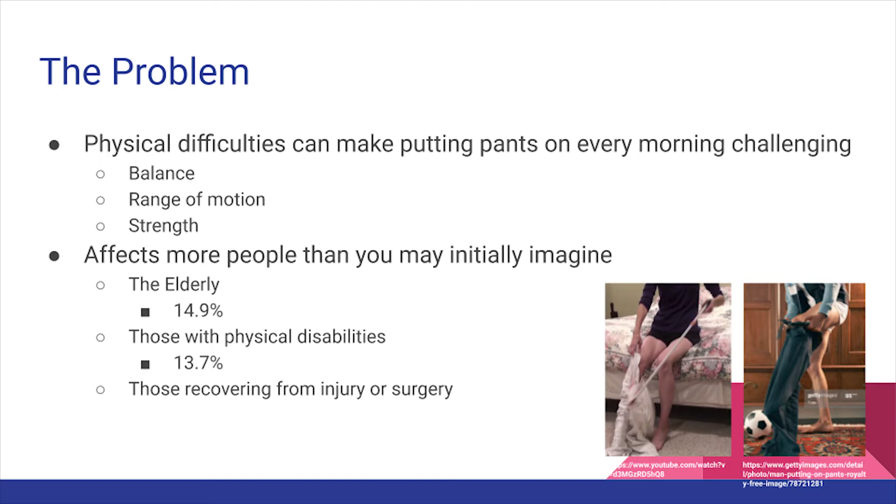The truth is, the world is designed around the average person, and the average person is young, able-bodied, and unimpaired physically or cognitively. But most of these people are also destined to reach an age where this average world also underserves them. We want to have the first product to completely automate pants dressing with zero user effort.

This product won't be as flexible as something like that aforementioned grabber, and makes the assumption that if you're putting pants on, you're walking out the door, so you may as well knock out both in one daily action. However, we'll also be the first product to serve those who are less than able, as opposed to the highly competitive market for serving the totally infirm.

And while we're unlikely to be the cheapest or most successful product to ever serve this need, we hope that any success will spur similar innovation and competition in the domain of products which augment user independence.

Here we have our top customer requirements. They mostly boil down to put on pants without any user effort or particular ability beyond attaching pants, standing up, and pressing a button. Here are all of our identified product functions.

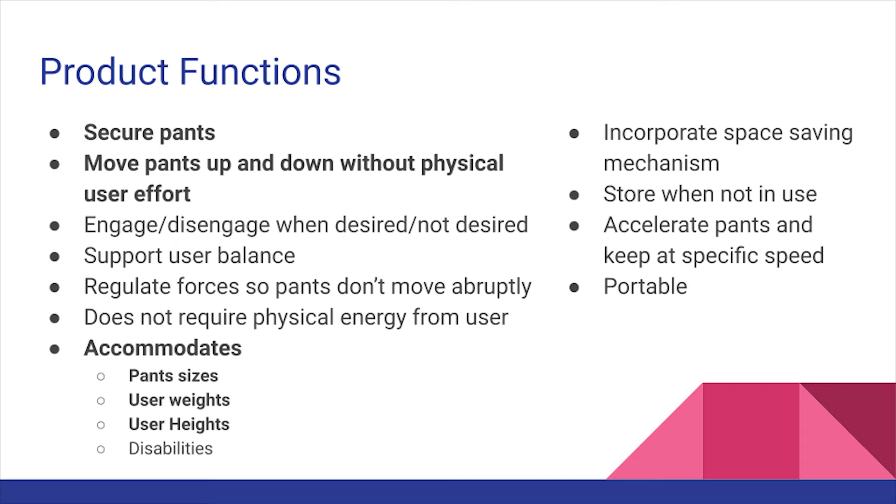Those in bold were refined further as a group using the 635 method in order to assist with design ideation, but also important considerations in our concepts were supporting user balance and engagement and disengagement methods.

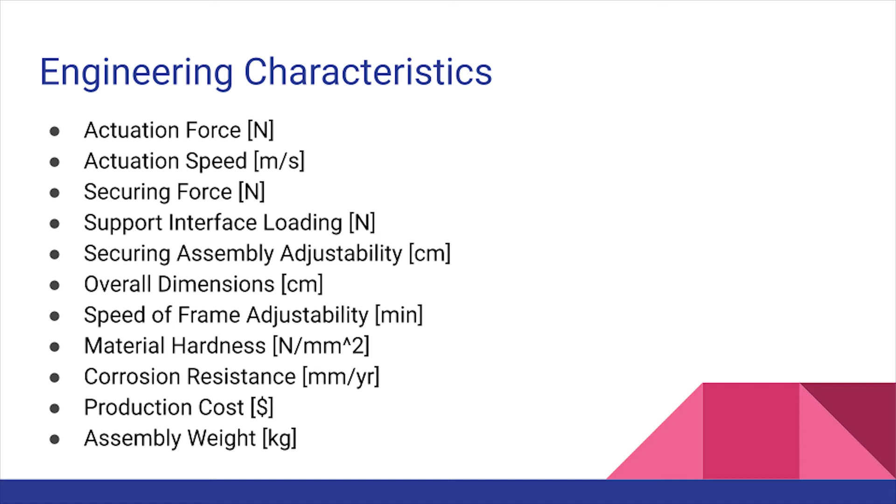This is a list of engineering characteristics we developed, which we believe effectively quantified all relevant performance metrics during the solution-neutral concept development process. But despite solution neutrality, there were universal constraints we needed to consider for any design.

We decided to design our minimum max load case around the 95th percentile male, as this would include more than 95% of the population. This meant we needed to support that weight, which would be 98 kilograms, and actuate to that waist height, which would be 122 centimeters.

This is also a household object, so it had to fit through US building code doorways, and needed to be a reasonable weight for an able-bodied person to manipulate if assistance was required.

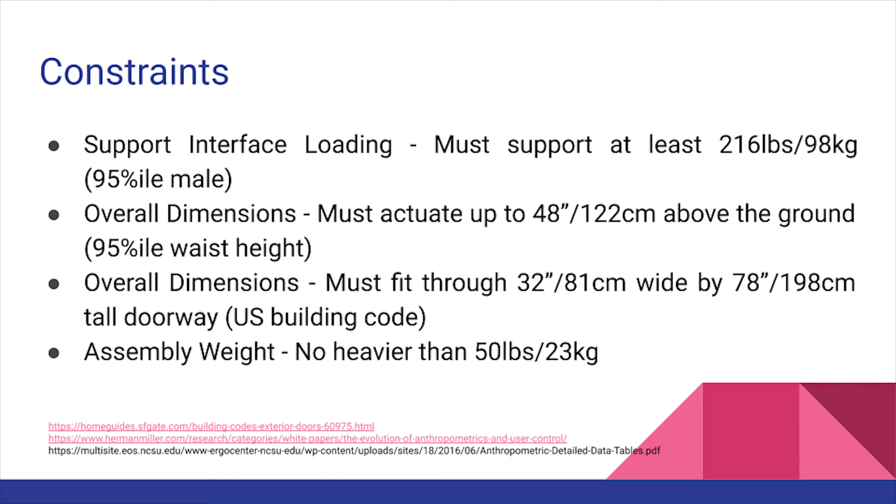This finally leads us to our list of decision criteria, or the set of quantitative and qualitative characteristics we used for methodological concept analysis and comparison.

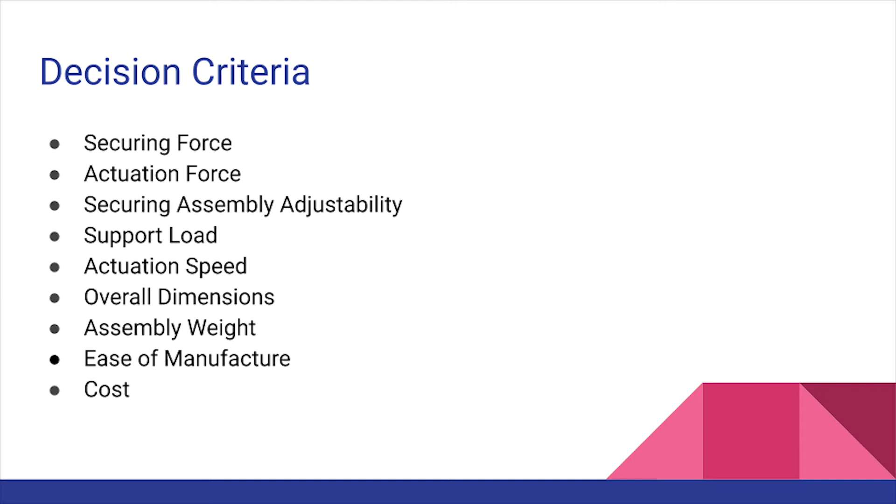So now I'm going to discuss our team's concept development process.

So as a team, we created a concept chart that was comprised of the best physical designs for each concept function. Our concept functions are listed on the chart.

So in order to come up with a final concept design, each team member brainstormed a new design that incorporated all 3 product functions.

And in this updated chart, you'll see the combinations of designs that each team member chose based on the color code. And also, because some team members have similar ideas, they worked together to narrow down their concept design.

So now I'll be showing each new concept and discuss how they're appropriate and distinct from the others.

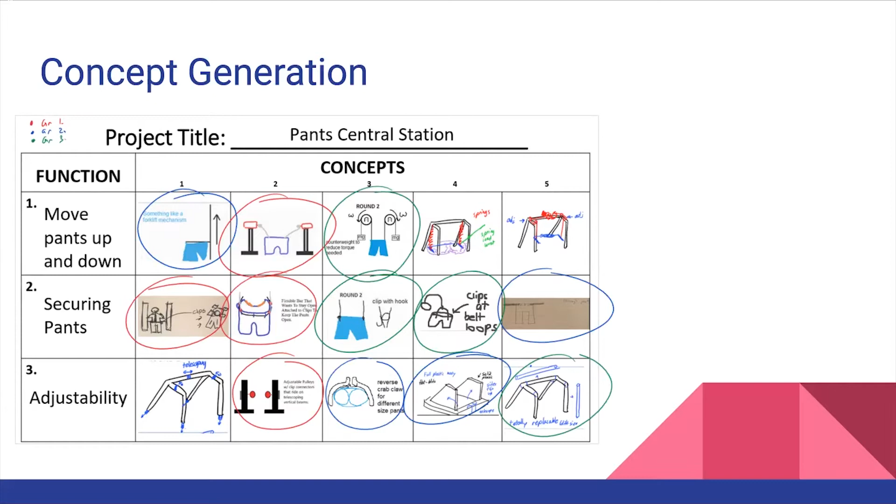In this concept, there's a button that controls the movement of the apparatus, the contour springs bring the pants up, and the motors bring the pants down. So this could also help take the pants off if needed. And this is the only design that uses springs.

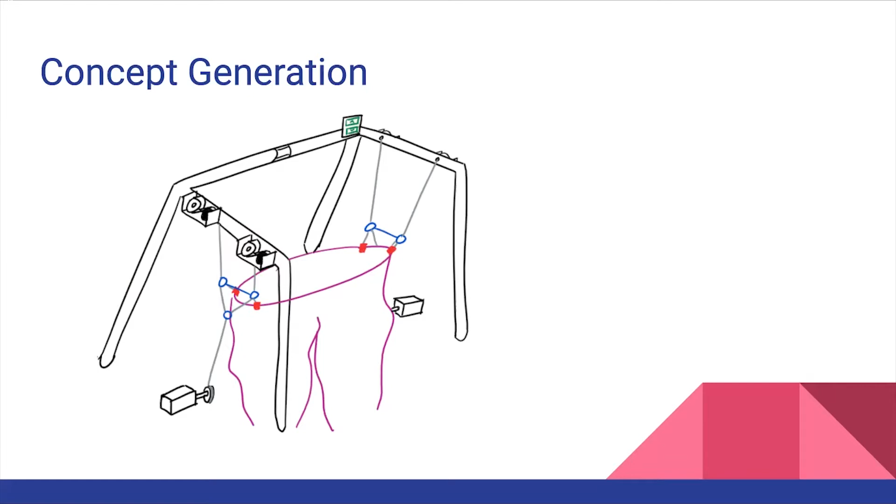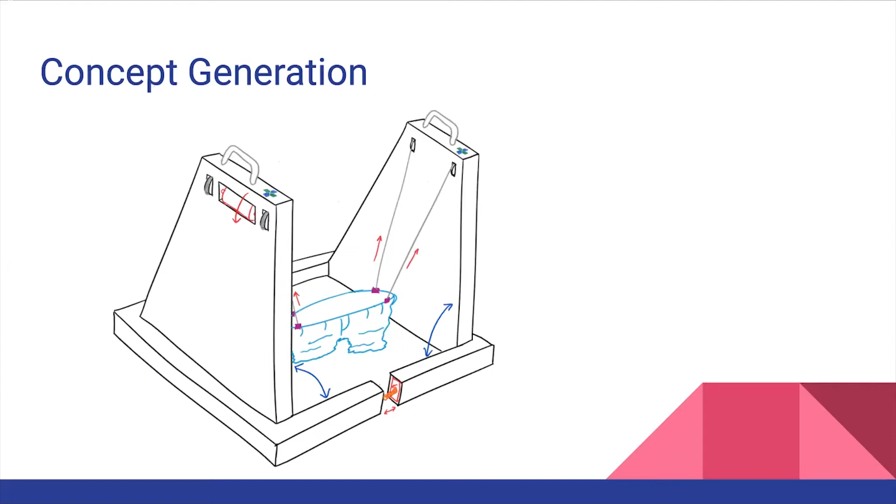And this design has a main structure made of 2 disconnected stands that allow the structure to be adjusted, and it also utilizes a pulley and motor system.

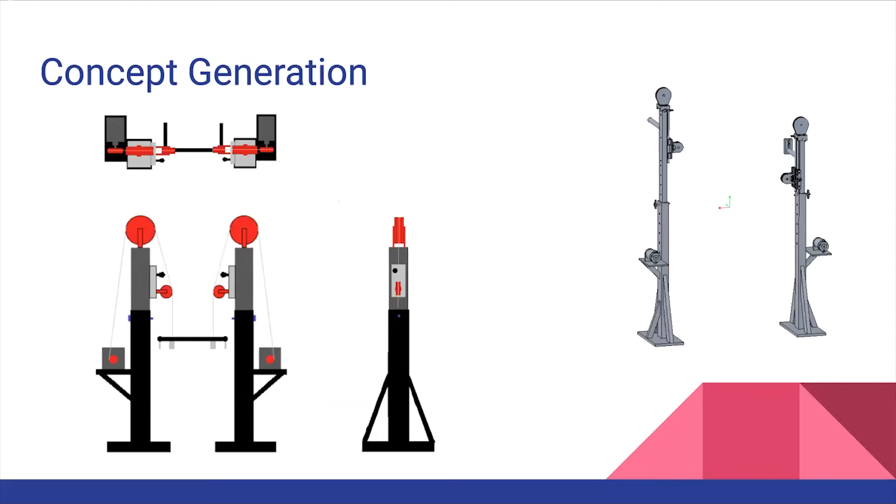In this design, there's a winch and pulley system and a roller on rails for constraining.

And lastly, in this design, it's a lead screw connected to a motor that lifts the apparatus, and a linear motion shaft that constrains the motion.

After drawing each new concept, the team discussed each concept design in depth using the Pugh analysis and the Pugh chart. The first concept is a baseline, and the other concepts are compared to it. A plus sign means it has more potential, a minus sign means it has less potential. At the end, we added the pluses and minuses and determined that the final 3, highlighted in green, were the most advantageous. This is how we narrowed down from 5 concepts to 3 concepts.

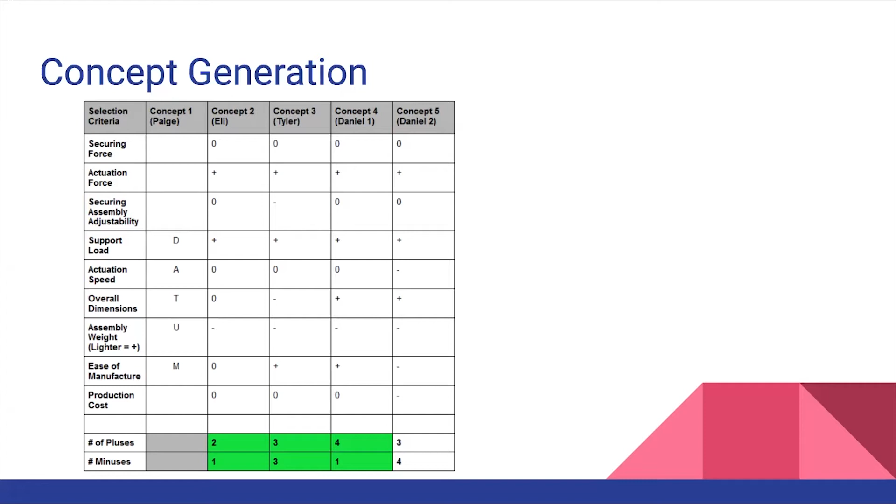Now Jennifer will discuss these 3 concepts in detail. I will be talking about our final 3 designs.

The first one consists of 2 wall frames made out of plastic attached to metal handlebars on the top. There is a DC motor connected with pulleys on each side of the frames. The bottom rectangular pieces use lead screws to slide in and out, and the person can use both controllers on either side to adjust the lower width of the structure, as well as adjusting the pulleys. There are 4 clips that attach to the pants, and the entire frame is foldable for easy storage.

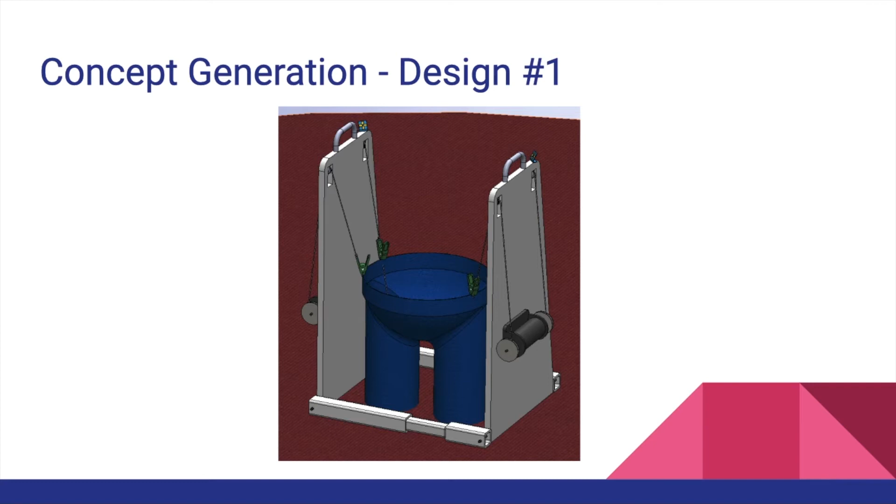The second design is made out of steel uni-struts. On the top, there is a winch that connects the pulleys with the DC motor on the bottom of the structure. There is a steel frame that slides up and down along roller bearings, and there are molded steel bars attached to the frame to attach the pants with clips. The frame can be controlled using the up and down buttons on either side of the handlebars. The whole structure could be easily disassembled by taking the bolts off of the struts.

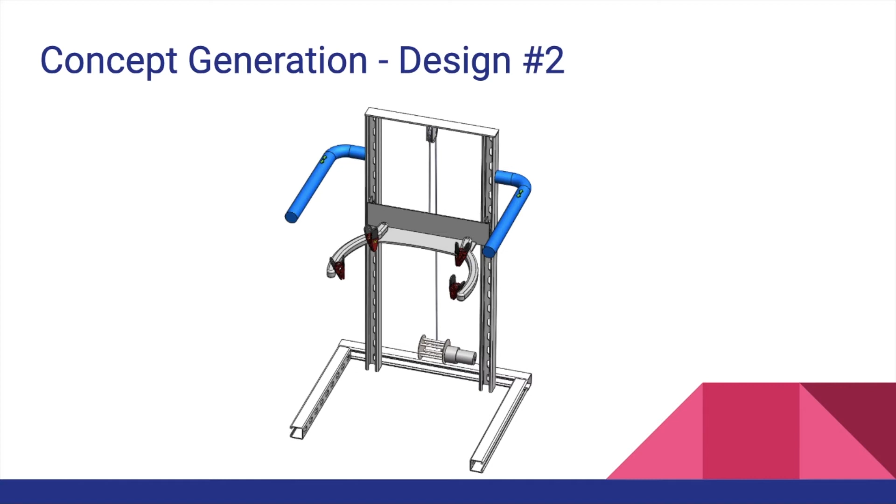The third design is made out of 2 freestanding pillars. There are 2 systems of pulleys with 2 DC motors. The motors are located on the aluminum struts at the bottom half of the structure to lower the center of gravity, allowing for a more stable design.

The pillars can be adjusted through locking pins, and the pants can be attached with clips to a metal bar that will be in the middle of the 2 pillars. The bar is shaped as a half square and is attached to the pulleys, and the user will be able to control the movement of the pulleys and handlebars through Bluetooth.

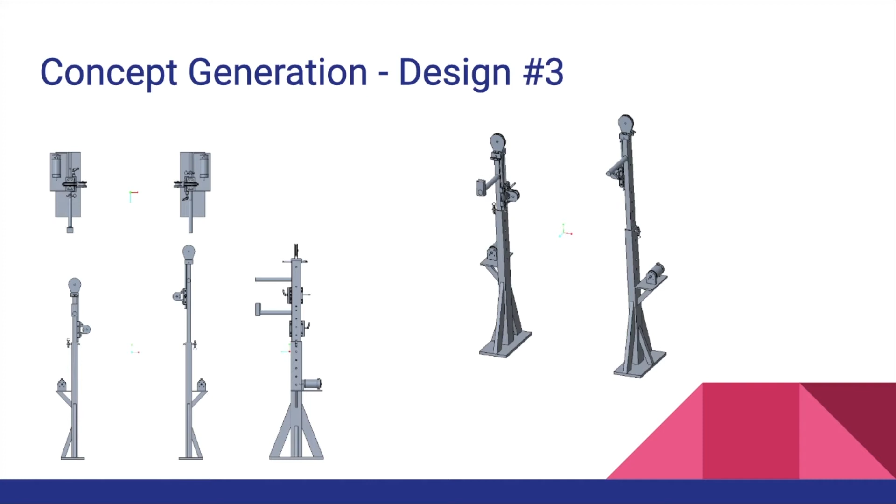For the final concept selection, our overarching goal was chosen to be: put pants on. The reason we chose this as our goal was that, as a team, we believed it best fit the problem that our product is being designed to solve.

With this overarching goal in mind, we chose what we believe are the 3 most critical design criteria that must be considered. These 3 criteria deal directly with our targeted customer base, made up of older and weaker individuals. Safety and ease of use touch on these aspects of our customer base almost exclusively, and we felt these 2 design criteria would be most appreciated by our targeted customer base.

Cost was also a very important design criteria that we believed needed to be considered. As our team wants to keep the cost of this product down to allow it to reach a wider customer base, cost must be considered during design. After going through the first steps of the AHP, we came to the conclusion that the rankings are safety, then ease of use, then cost, based off of the averages found.

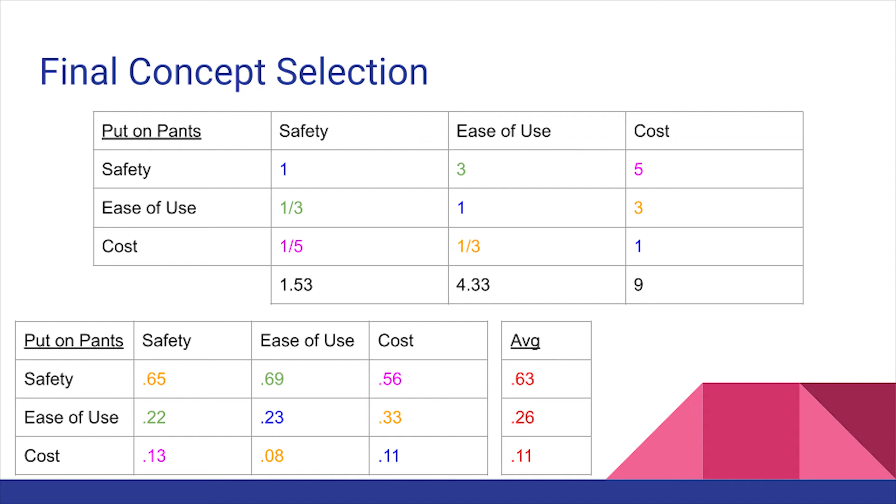The first design criteria looked at in our AHP was safety. With this criteria being our most important one, we took great care in making sure the concept-to-concept comparisons were done thoroughly and accurately. When all was said and done, it was revealed that Concept 2 was by far the most safe concept that we had come up with, while Concept 3 was the least safe.

The second criteria we chose to look at was the ease of use aspect. We again made sure to perform the concept-to-concept comparisons thoroughly and accurately. After performing the various calculations for these concepts, we found that Concept 1 was by far the best concept when it came to ease of use.

The third and final criteria we chose to look at was the estimated cost of each concept. From previous on-hand knowledge, as well as various websites like McMaster-Carr, we were able to determine an accurate estimated cost for each concept, which factored into the comparisons.

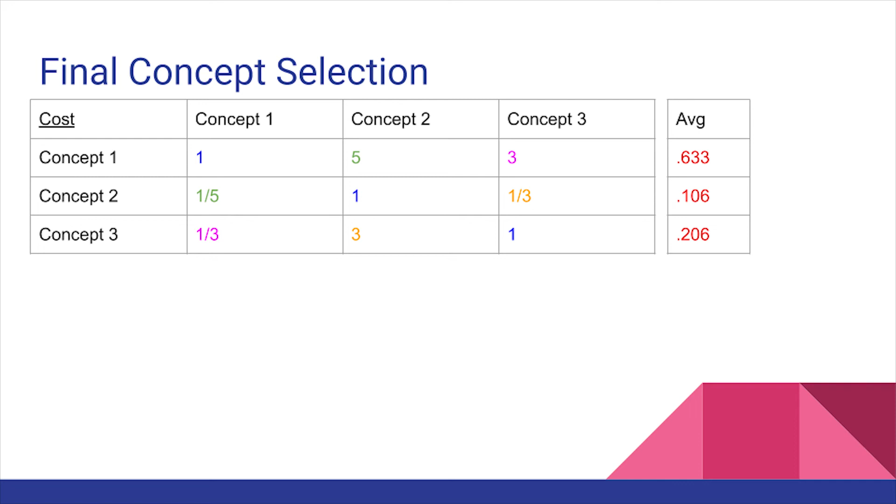When all was said and done, Concept 1 came out to be the cheapest option by a large margin, which is reflected in the final averages.

Once all 3 individual design criteria were analyzed, the results were pulled together and the AHP was finished to find the aggregated weights for each concept. After performing the calculations, it was revealed that Concept 2 would be our team's chosen concept, with Concept 1 coming in a close second.

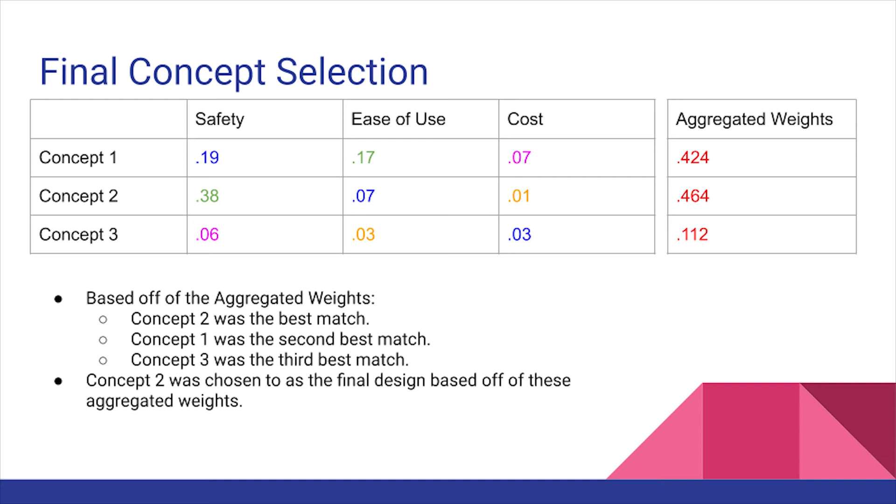For the safety criteria, we said that concept number 1 was moderately unsafer than concept number 2 because concept number 1 had a frame at the bottom, which poses a tripping hazard for most users, as well as exposed wires when the user is going to put on pants.

We said concepts 1 and 2 are safer than concept number 3 because concept number 3 has the user adjust the height and width of the apparatus for their desired fit, which can pose a tipping hazard since concept 3 isn't tied down to anything - they're freestanding. We also said 1 and 2 are safer because they account for all user populations, but concept number 3 only accounts for younger populations due to the physical effort required to move the apparatus around.

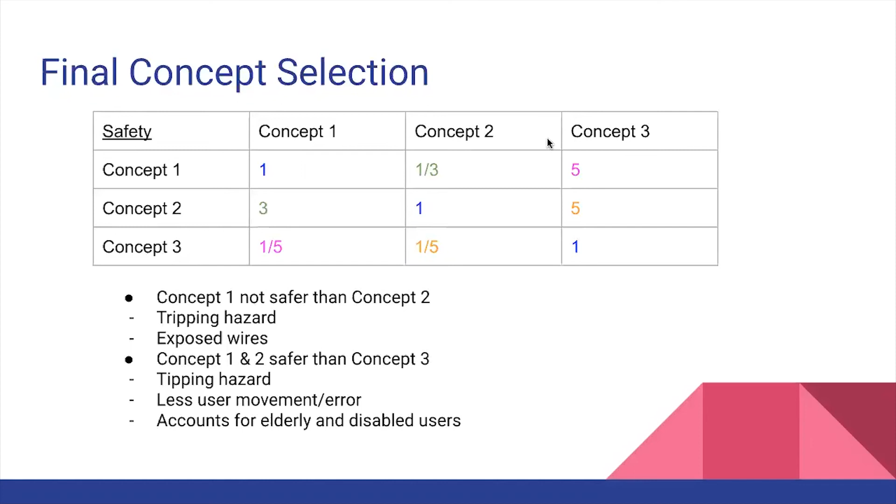For the ease of use category, we said concept 1 is easier to use than both concepts 2 and 3, because concept number 1 has less user interaction and is more automated. Concept number 1 uses a D-pad interface with up and down arrow keys to account for the up and down movement of the pants, and left and right arrow keys to account for the adjustable width of the apparatus.

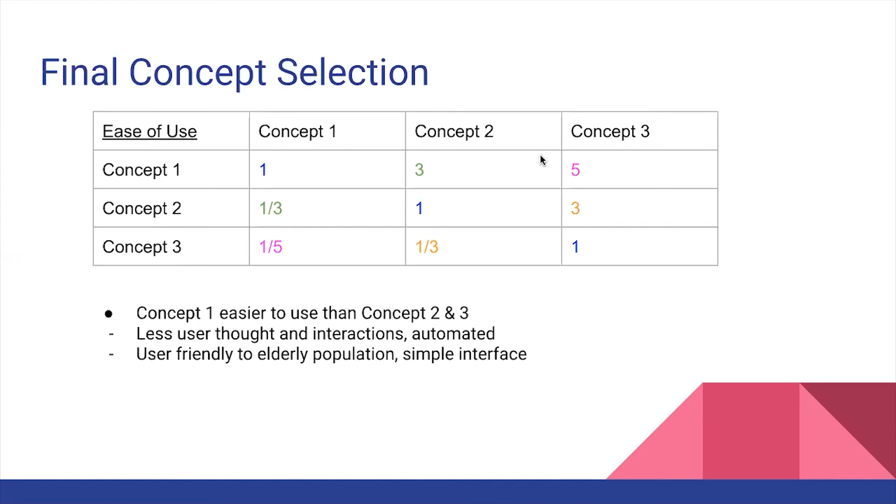For the cost criteria, we said that concept number 1 costs less than concepts 2 and 3 because concept 1 is made of plastic versus concept 2, which is made of steel, and concept 3, which is made of aluminum. It is easier to manufacture plastic than aluminum and steel.

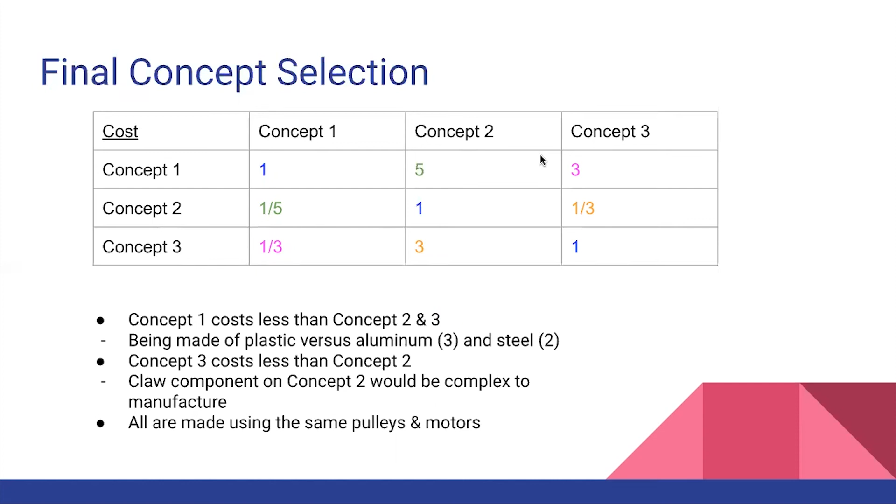This was the final concept that our team chose for our project. The unique aspect of this design is the cantilever design, which helps prevent tangling with wires compared to concepts 1 and 3. This design utilizes a single electric motor and a winch and pulley system to raise and lower the pants holding apparatus.

This decreases complexity and cost compared to the 2 motors required for the other concepts. The wire is connected to a lifting mechanism for the pants that is constrained with a roller rail system, only allowing vertical motion.

Some other critical features include large diameter handle bars to accommodate people with arthritis, control switches on both sides for left and right-handed users, and a self-adjusting claw to accommodate different pant sizes.

We believe that this concept is truly the best method for solving our problem for the following reasons. It was the highest ranked in the Pugh chart based on our decision criteria, and the highest ranked in the AHP based on our 3 most critical design criteria: safety, ease of use, and cost. Finally, we believe this design is the safest due to the nature of the cantilever design.

This design allows for a sturdy base without the addition of a tripping hazard like in concept 1, and the pulleys and wires don't act directly on the pants like in concepts 1 and 3, which could be a tangling hazard as well as a pinching hazard.

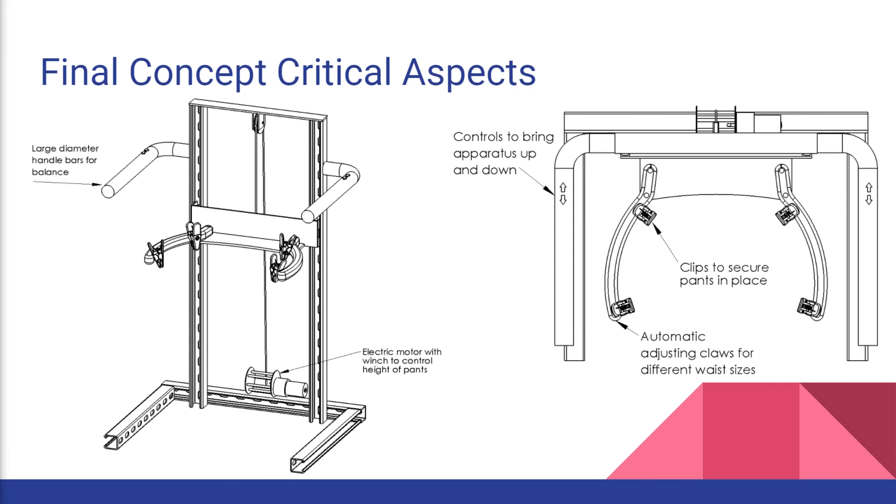The concept strengths that this design has is that it is easy to use. There are only up and down controls, and the claw allows for easy adjustability for pants waist size.

This design also incorporates a couple of safety features. First, it has a plastic guard to cover most of the moving components, and the motor is mounted low for a low center of gravity to resist tipping.

However, this concept has a couple of weaknesses. The first is that the claw design is pretty complex and may be harder to manufacture and design.

The second weakness we want to focus on is the size. The size of this concept is fixed, unlike concepts 1 and 3, and the overall volume can't be changed easily, so storing this design could be hard.